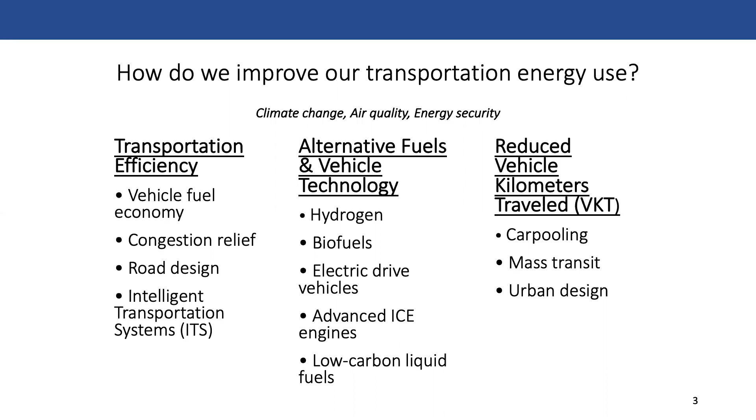Okay, so this is what I was just discussing - these are sort of the technical options, mainly in the first two categories for sustainable transportation. So we'll think about some of the status and projections as it relates to each of these things.

So for travel demand reduction, these are policies to encourage things like mode switching - carpooling, cycling, walking, combining trips, or even telecommuting. That's a big one, especially these days - unless you're doing essential work, you are most likely telecommuting. And that's actually led to some pretty dramatic decreases in the use of our transportation system and the associated energy and greenhouse gas emissions impacts.

One of the things folks advocate for are policies that promote what's known as smart growth. If you plan cities so you don't have to travel as far, or design the city to be more accommodating for walking and biking as opposed to driving, it inherently gets people to switch to other modes.

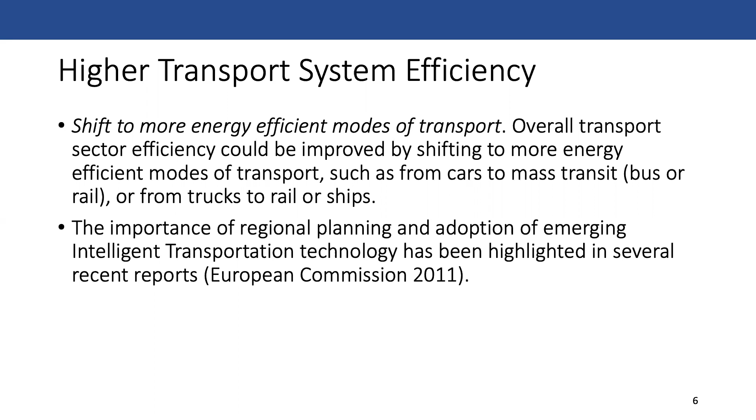And then the last one is thinking about potential for alternative fuels. We've talked about how switching from gasoline to an alternative source helps with a couple topics. So even if you don't believe in climate change, which hopefully no one in this class is on that bandwagon, even then, oil supply security, national security, security for your energy resource is one really big benefit that's really independent from issues with climate change. So there are benefits to be seen across a variety of different topics.

Some of the alternative fuels that we'll be thinking about: biofuels, electricity, hydrogen. We're not going to talk so much about advanced fossil-based fuels, so this is like unconventional oils. We've discussed this a little bit in previous lectures, but these are like synthetic fuels. So if you were to make gasoline not from oil, but through chemical processes, the generation of that fuel, if it's done with a renewable resource or something like CCS, it could in theory be clean.

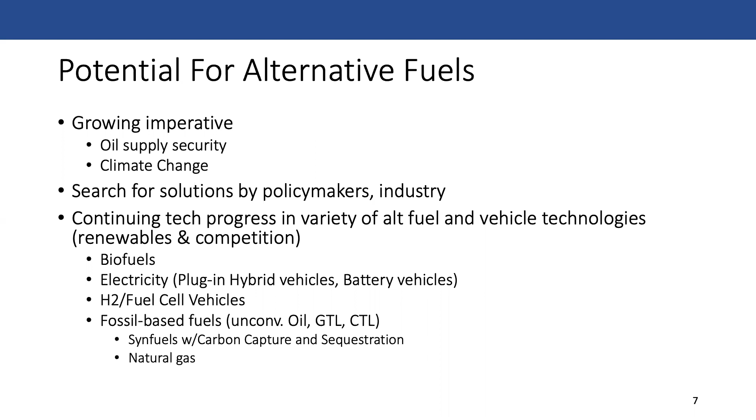There's lots of acronyms in transportation, so I'll go over them as I see them, but if I miss one, feel free to speak up. So ICEV stands for internal combustion engine vehicle. We call basically conventional vehicles ICE vehicles, and then HEV stands for hybrid electric vehicle, and that is something like a Prius. It still uses gasoline, but it has a battery that lets it do regenerative braking and such. There's a little bit of natural gas that can be used in internal combustion engine vehicles. There are certain types of natural gas combustion vehicles. They're pretty rare, but they do exist.

And then we have ethanol coming from biomass. Those are both blended into gasoline for regular cars, but also in flex fuel vehicles.

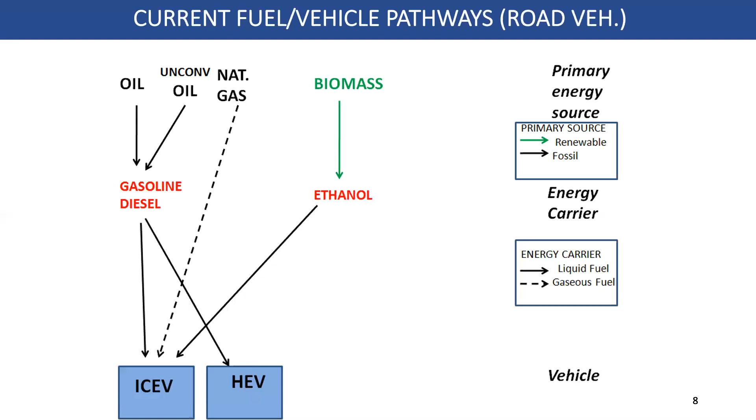And then when we think about potential futures, we'll talk about these technologies in just a second. You've got your plug-in electric vehicle, a full battery electric vehicle, and a fuel cell electric vehicle.

And the potential energy sources from which you can essentially make any of these alternative fuel vehicles is coming from a huge variety of sources. You probably want to avoid the more fossil fuel based ones, and you want to transition to these renewable sources. But the point is, these technologies are offering lots of potential pathways into the future.

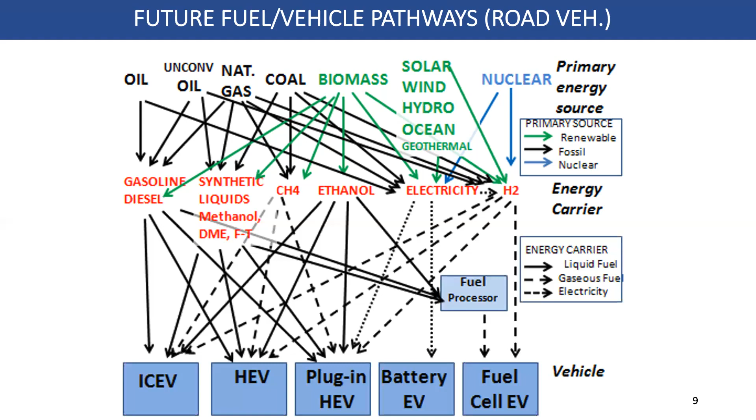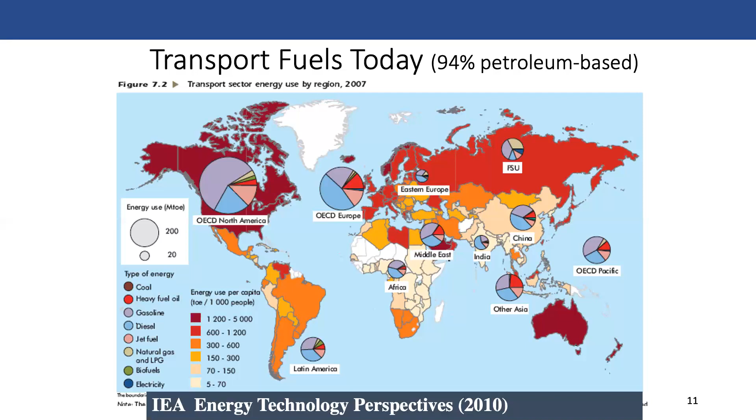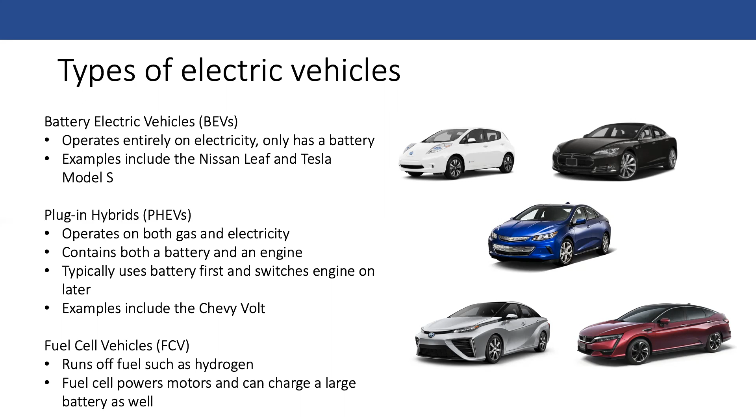A lot of people talk about self-sabotage here. There's a pretty fascinating documentary, if you guys find yourselves bored at home and want to take a look, called Who Killed the Electric Car? There's also a follow-up documentary called Revenge of the Electric Car, which addresses a follow-up to the first documentary. But anyways, that electric vehicle...

...had a lead acid battery, an 18.7 kilowatt hour battery, which translates to about 80 to 100 miles. Then in later generations of it, before it was canceled, they upgraded it to a nickel metal hydride battery, a NiMH battery, which coincidentally is the sort of battery that's really mainstream in hybrid vehicles before they started switching to lithium batteries.

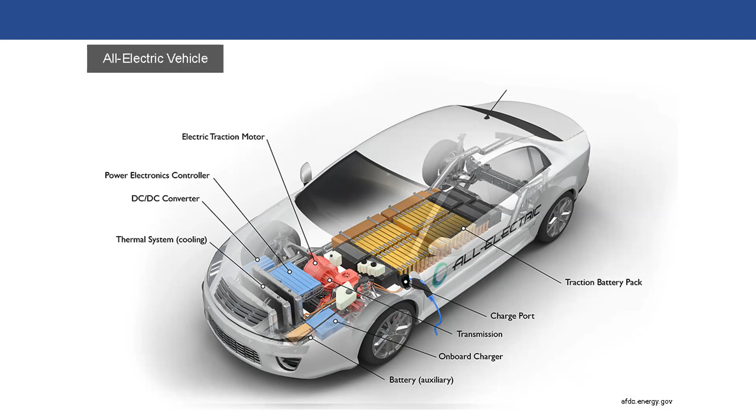As I was mentioning, a lithium-ion battery refers to a whole suite of different chemistries. You've got things like lithium iron phosphate, lithium ion manganese oxide, lithium nickel manganese cobalt oxide. Again, these aren't things you necessarily need to remember, but the thing about lithium ion batteries is that these technologies have different characteristics.

We're not going to get into the mechanical engineering aspects of batteries, but just know that depending on the chemistry and configuration of the battery, you have inherent trade-offs between weight, density, power output, and energy output. You can see this trade-off happening here, and there are specific improvements where you can get smaller versus lighter.

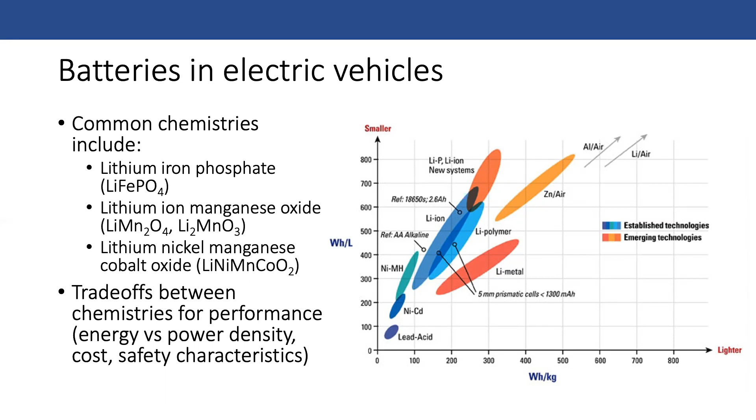I would say I can't speak too much about this because I'm not super familiar with the political situation and trade situation regarding these materials, but I do think it's something lots of folks are thinking about, and there's definitely studies and discussions and organizations that have published reports about this. I haven't heard it being characterized as analogous to the situation in the Middle East, but I guess I wouldn't be so surprised if that were to happen. I don't think we're quite at that situation yet, but it's good to have that insight.

Okay, great. So I'm going to skip this because we've actually talked about the motor before.

So this is a diagram analogous to the one before, but instead of a pure electric vehicle, battery electric vehicle, this is a plug-in hybrid electric vehicle. This one is probably the most complicated because it's got components of everything, right? It has all the components of your regular gas engine—the engine itself and everything associated with it: the timing belt, crankshaft, camshaft, cams, fuel injectors, the transmission, all of that. But you've also got a battery connected to a motor, the power electronics controller, and your converter. So these things are, from a technological standpoint, most complex because they're combining the complexity of the two technologies. You also have the downstream exhaust system, which you don't need in a battery electric vehicle, because there are literally no byproducts—it's just everything's contained within the battery.

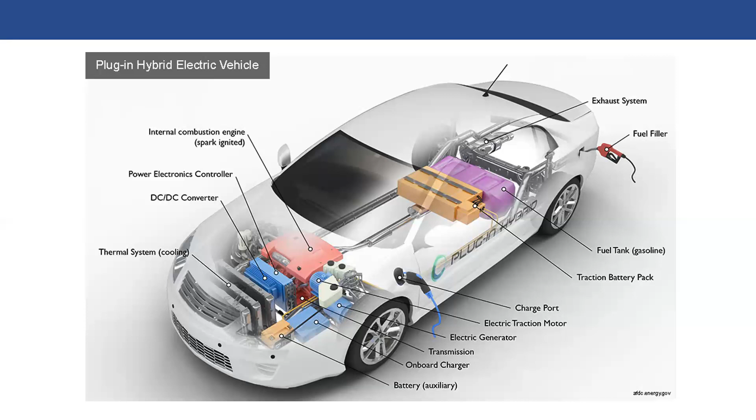To further confuse you, plug-in hybrids can be designed in slightly different configurations, and different vehicles that exist today use a lot of these different configurations.

Actually, even when you talk to folks at dealerships, they don't know much about this. To go on a bit of a tangent here, one of the big things with adoption of electric vehicles that we study is consumer behavior, and one of the issues we've looked at is how dealerships are promoting these new technologies. A lot of times they don't really know how to deal with them, and they discourage consumers from even buying electric vehicles. It really depends on a case-by-case basis.

But anyway, going back to this - okay, what's going on here? In a series configuration, your engine cannot actually turn the wheels of your vehicle. What happens is you've essentially got a gasoline generator - like a lot of the generators we've talked about in power plants, where combustion spins something, and it's spinning the generator to produce electricity for the battery. All the electricity in the battery can then go into a motor that spins the wheels. So in a series setup, only the battery is able to spin the wheels, and if your engine is on, it's powering the battery directly, not the wheels.

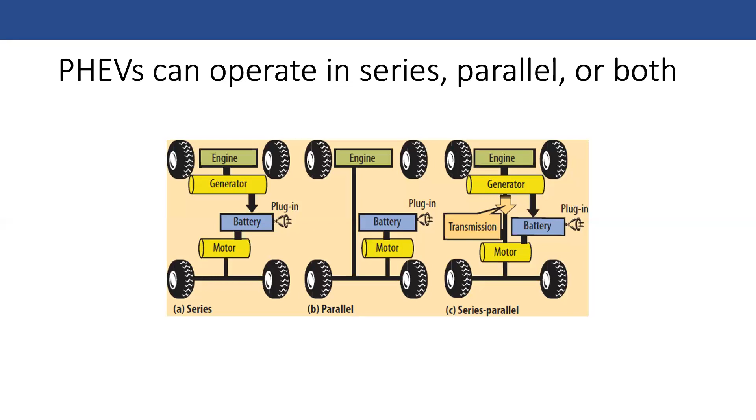When we talk about adoption of the technology, I think there's a common drawback people point to for electric vehicles, which is the time it takes to refuel your vehicle. When we think about a conventional vehicle, you drive up to a gas station, fill up in a couple minutes, and you're good to go for another 300 miles. Whereas with an electric vehicle, it can take some time to charge - quite a bit longer, actually.

But I like to point out that the flexibility of charging can actually be a pretty big benefit. When I ask people who actually enjoys going to a gas station, very, very few people say they actually like it. So the benefit of an electric vehicle is that you don't have to - you can refuel at places you normally go to anyway, like at your home, your workplace, or in public areas.

If you're going grocery shopping at Whole Foods, for example, you don't need to take trips that are unnecessary to refuel your vehicle. And sure, it definitely takes a lot longer to fuel up the car. On the other hand, your car is parked the vast majority of the time, right? 22 to 23 hours of the day, your car is just sitting there. So does it really matter

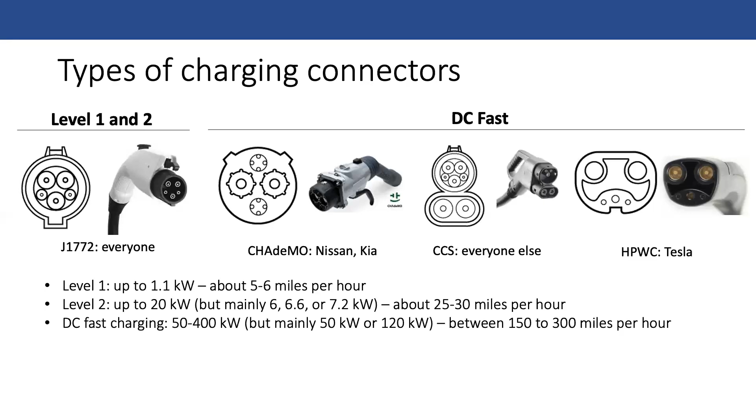I actually drive an electric vehicle, and my wife has one as well. One of the annoying things is that there are a lot of providers, different vendors, and they'll all follow the same standards - they'll have your J1772 chargers, and either CHAdeMO or CCS, or if you're Tesla, the Tesla superchargers, and they're all over the place. Some of the really big ones: ChargePoint, I'm sure you've seen this before, like at Target in Davis they've got a bunch of ChargePoint chargers. EVgo is a really big one for DC fast charging. Blink, there's a lot of these chargers around - they recovered them from older chargers and rebranded them. The ones at IKEA in West Sac are Blink chargers.

The kind of annoying thing is that unlike a gas station where you just pay with a credit card, a lot of these are specific to the provider, so sometimes you might need a membership, or oftentimes you're paying through an app. If I open my phone, I have like 17 different charging provider apps. If I go to a specific location, I have to find the one that matches the provider to be able to use it.

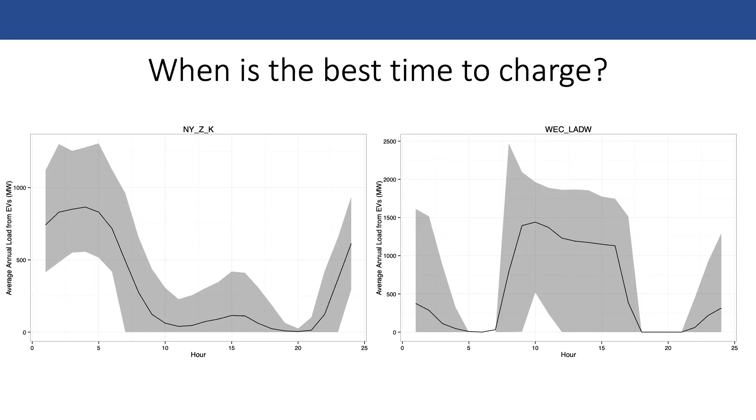This is actually a really big field, talking about the interaction between the vehicle and the grid. There's what we call V1G, which is unidirectional. That's where the utility or system operator has some communication protocol with a smart building or charging station, and it'll say if your vehicle is plugged in, it won't necessarily charge until it's given a signal to do so. That's one form of smart charging — essentially, hey, wait until there's a lot of solar power being provided, or maybe we have excess energy, or wait until electricity is really cheap, and then charge your vehicle.

The next step, which doesn't really exist on a commercial scale yet, is called vehicle to grid, or V2G, and this is bidirectional. It's a similar type of thing, but maybe it'll say, hey, you've got this battery in your car that can store electricity, so let's charge the vehicle when electricity is really cheap, and then sell the electricity when prices go up. Or conversely, let's charge the vehicle when emissions are really low, and discharge the vehicle when emissions would be really high — in other words, you're displacing a power plant from turning on by providing electricity through the battery on your vehicle.